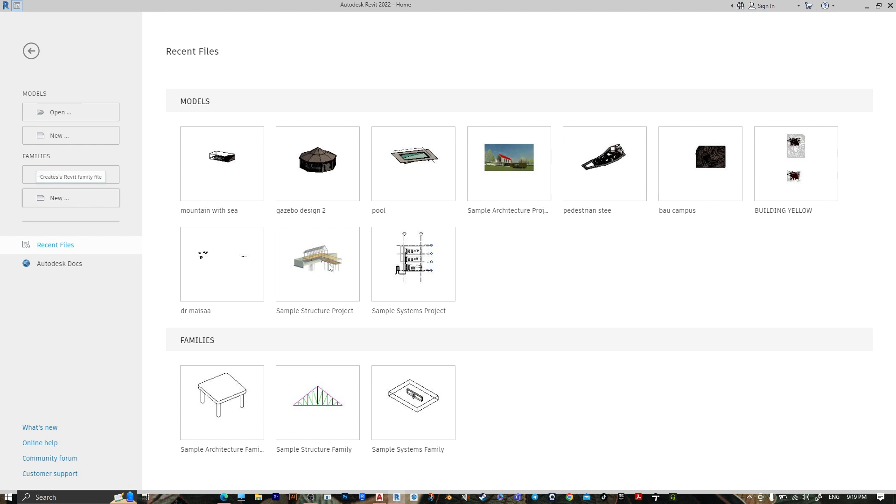Open Revit, go to families, go to new, go to English, select metric furniture system, then press open.

Change the unit, press UN, go to length, make it meter, and the rounding to decimal, then press OK, then OK.

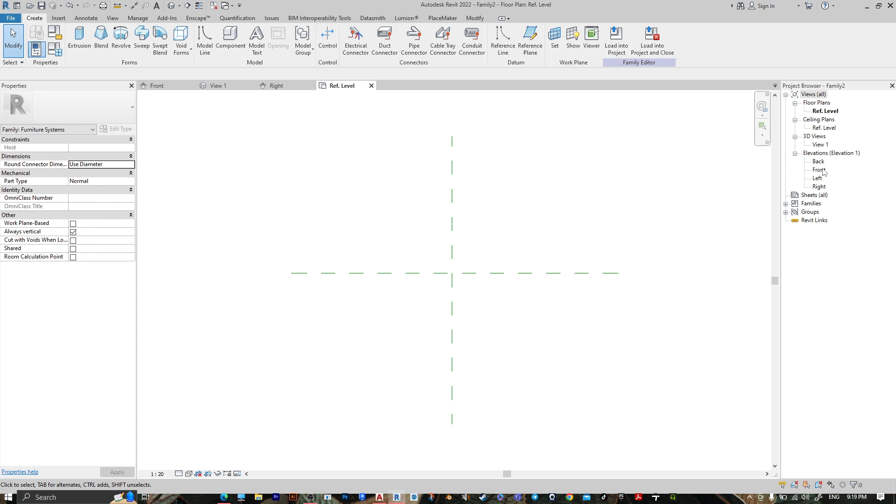Go to front, go to insert, import CAD, select your AutoCAD file, change the import unit, make it meter, and the position, make it manual center, then press open.

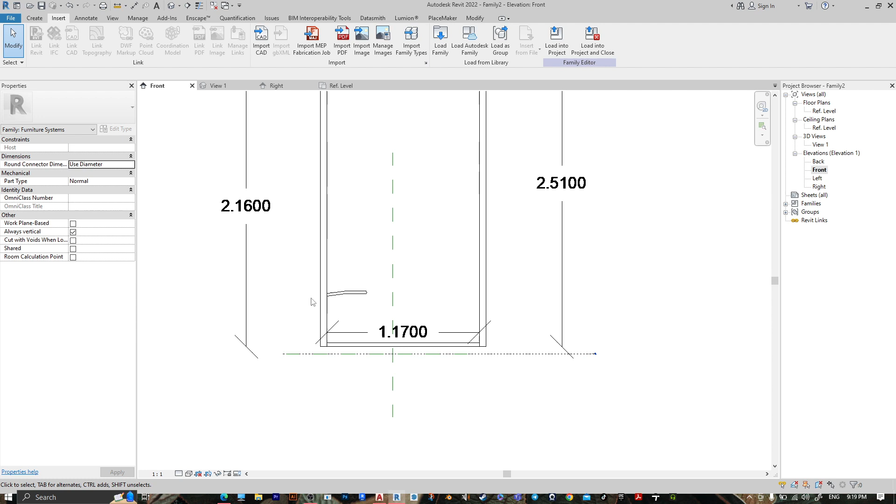Let's change it 1 to 1, move it, then go to create, extrusion.

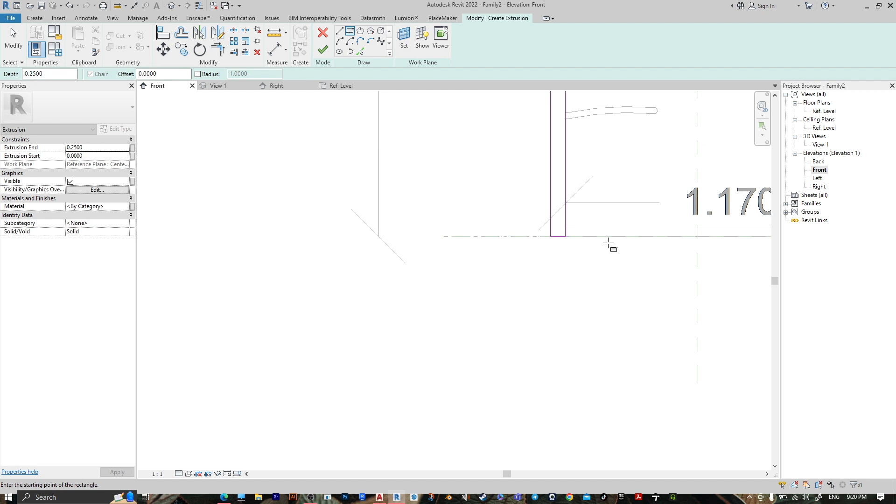Rectangle, select this one, then go to extrusion start from 0 and the extrusion end, let's make it 2 meter, then press finish.

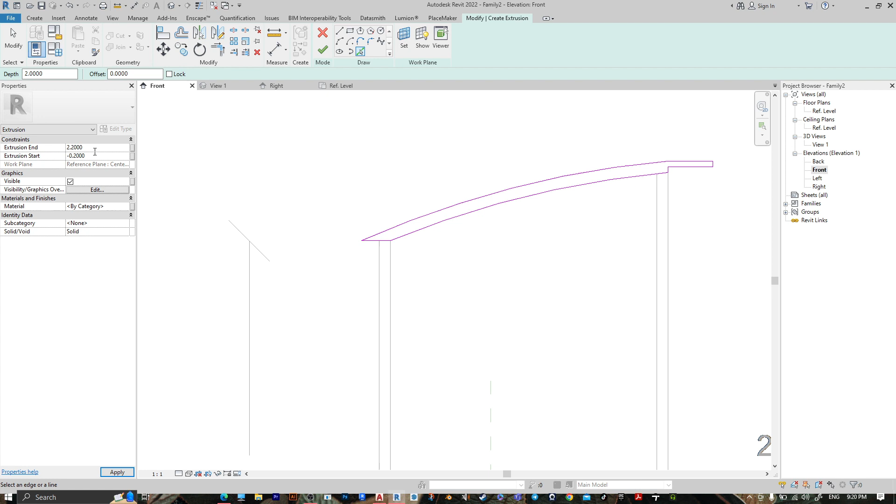Go to create, extrusion, pick line, let's choose this one. The extrusion start from minus 0.2 and the end 2.2. Then press finish.

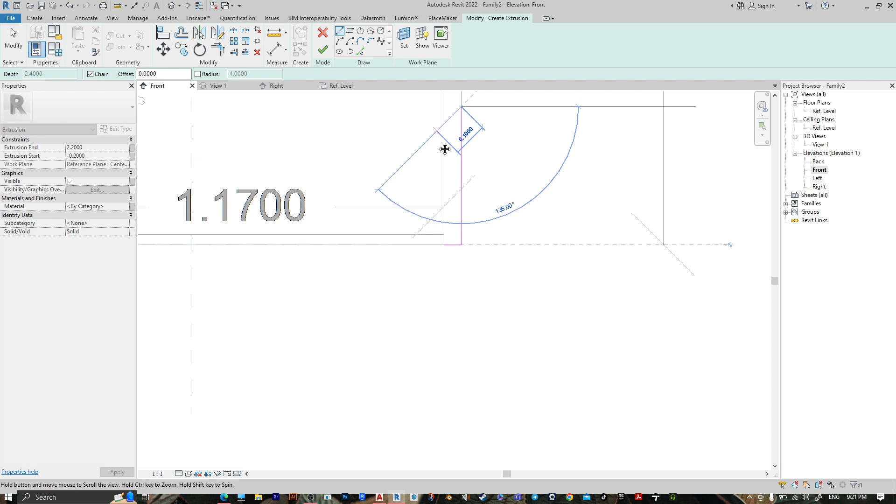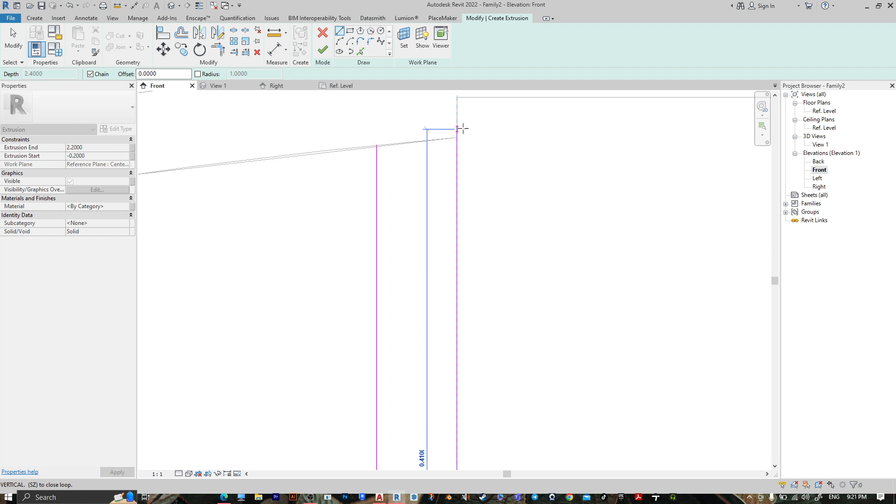Let's create this one. Go to create, extrusion, rectangle, or let's make a line from here like this. Let's go up 0.4. And from here the same, 0.4, and the extrusion start from 0 and end 2 meter. Then press finish.

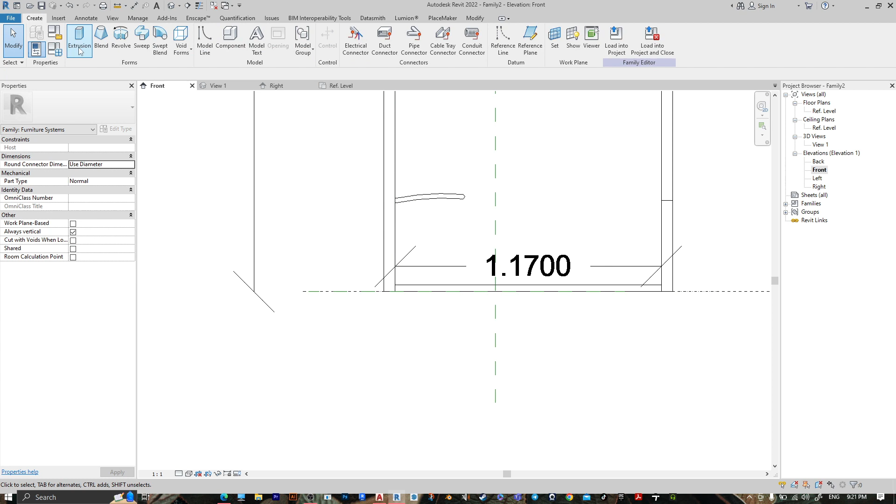Let's make the ground. Go to create, extrusion, rectangle, and let's make it from here to here. The same, 0 and 2 meter. Then press finish.

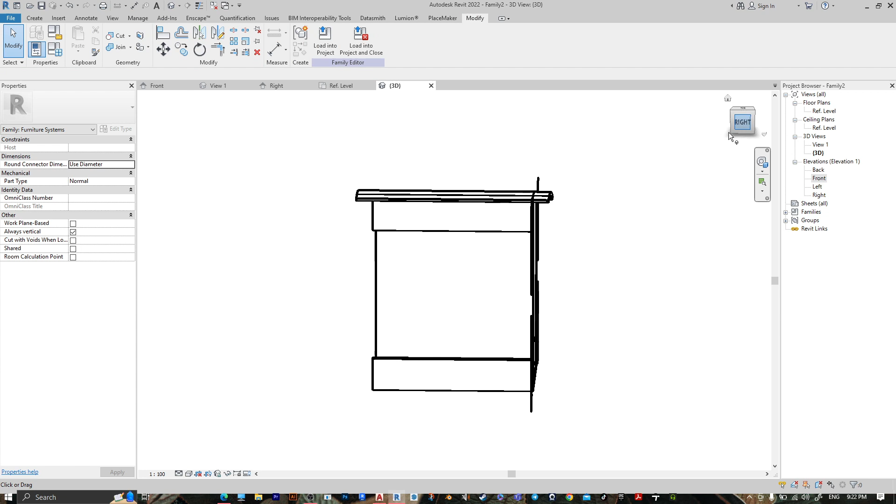Let's go to 3D, right, 1 to 1, create, void form, void extrusion, set, pick a plane, then press OK.

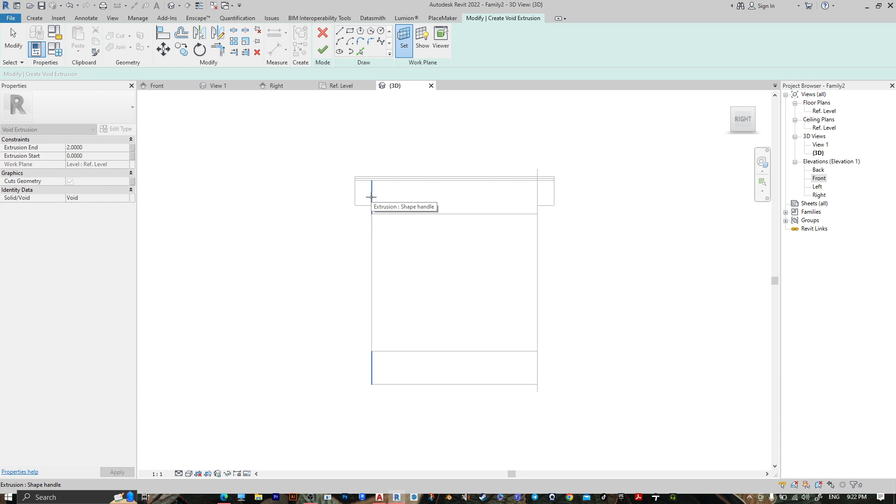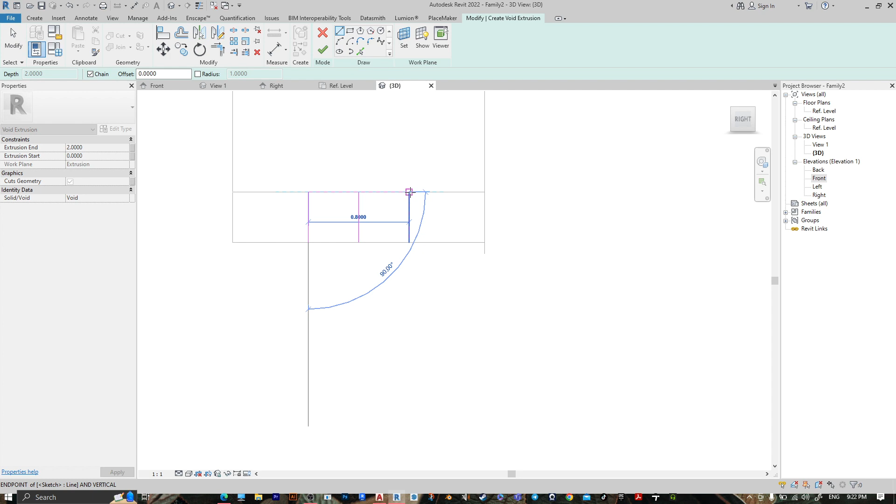Let's select this one, press tab. We want this one, and go line from the center, go offset 0.4, and let's delete this one, then press OK.

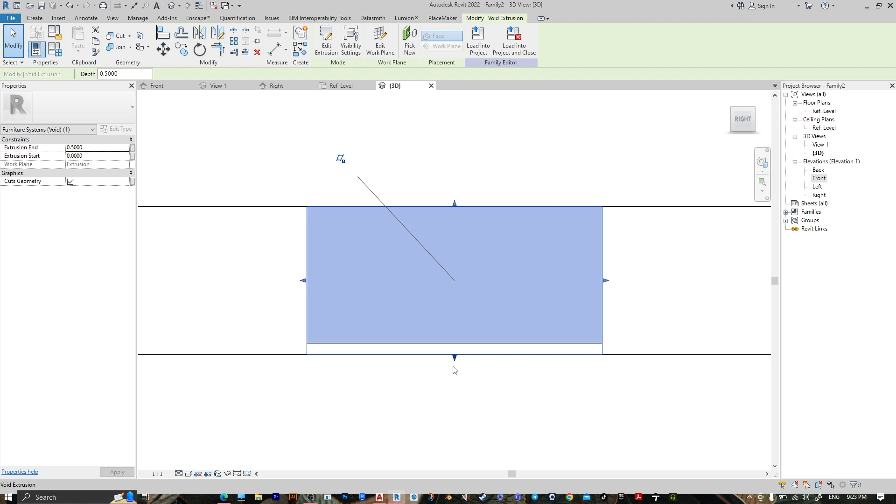Let's make it 0.5, and right.

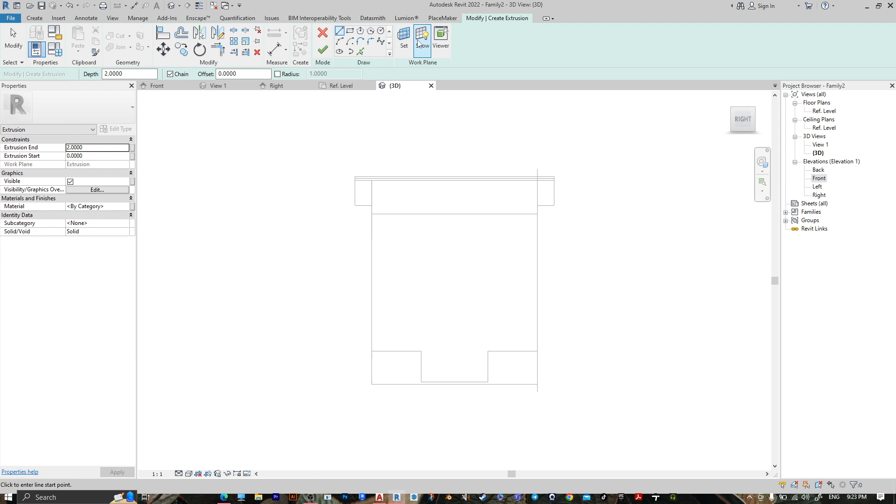Create, extrusion, we want this one, glass, create, modify the same, and go set, pick a plane, the same work plane, then rectangle.

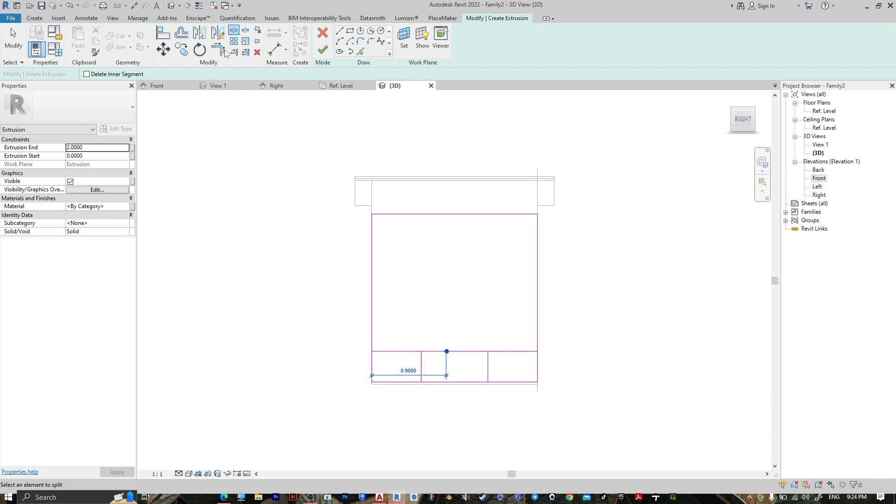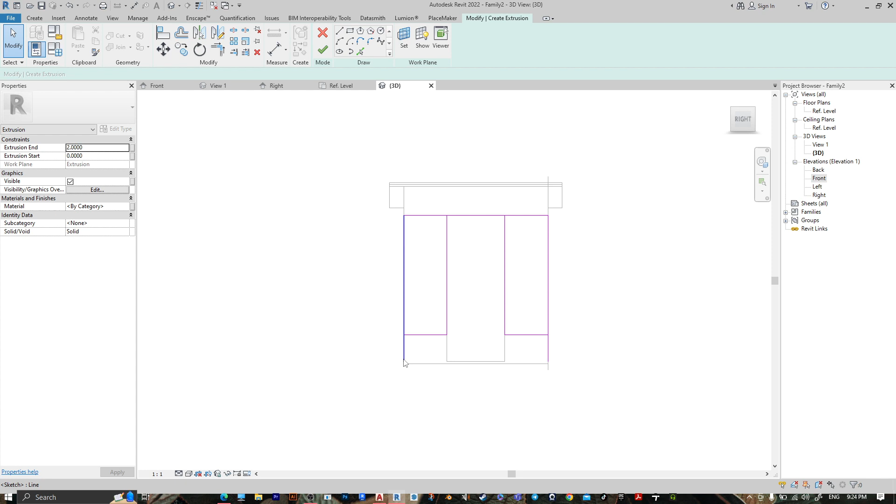Split and trim. Also this one. Then press finish.

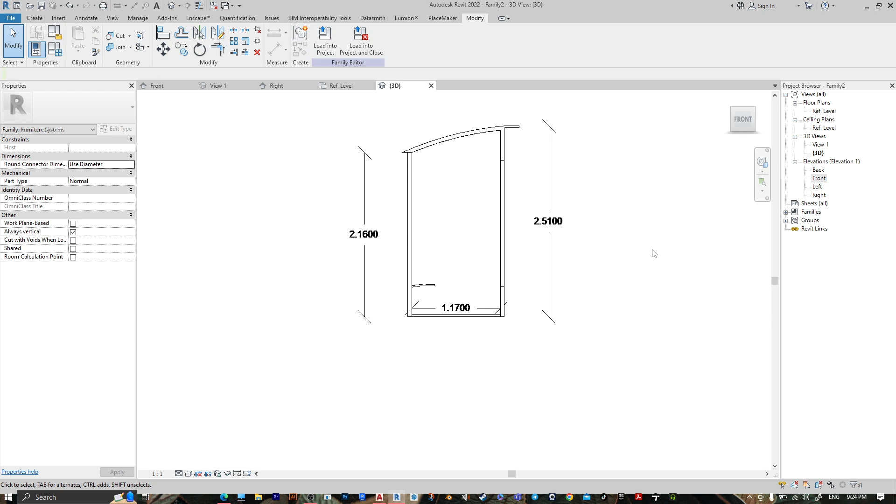We want this one. Create, extrusion, pick line, go to front, set, pick plane. Okay.

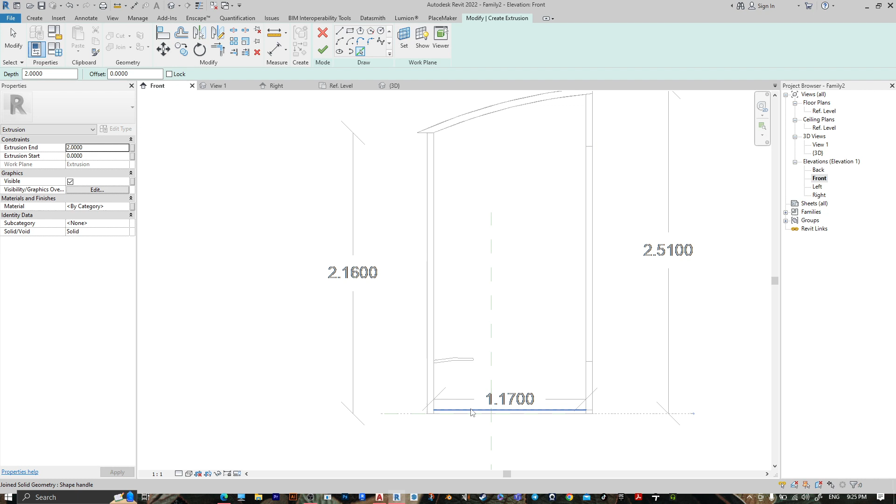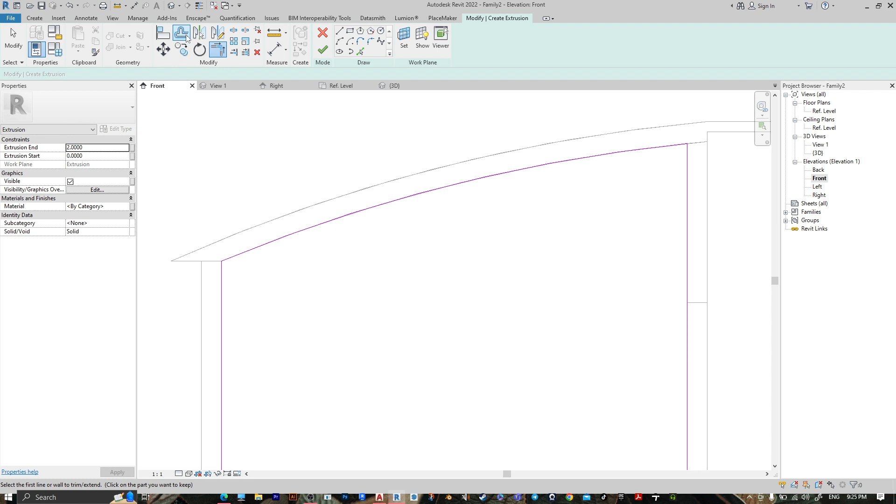Let's trim this one. Go offset. We don't want a copy. Also 40. And from here the same. Then press finish.

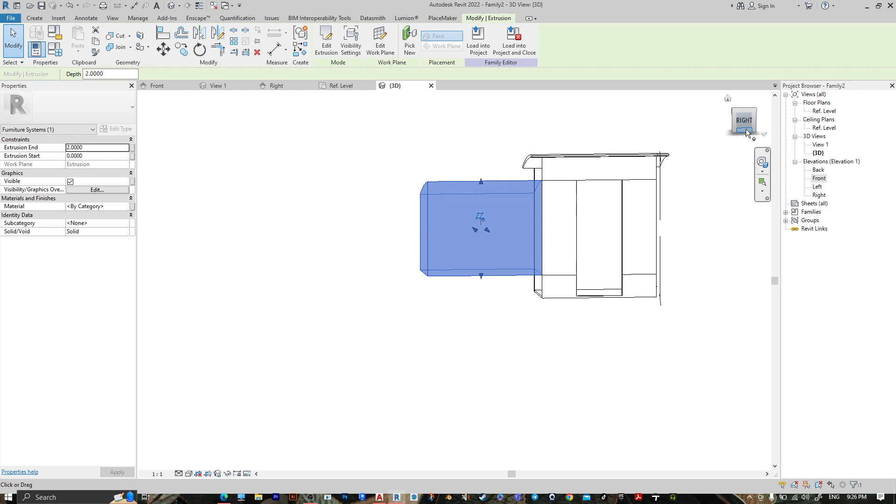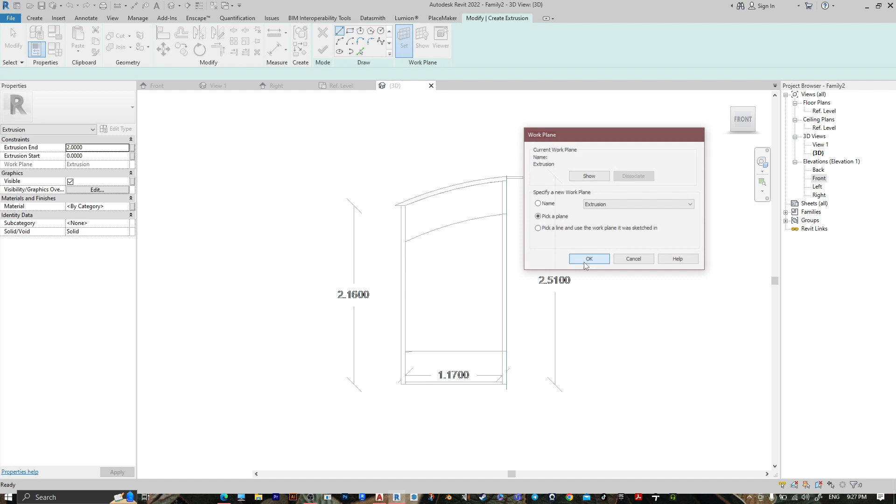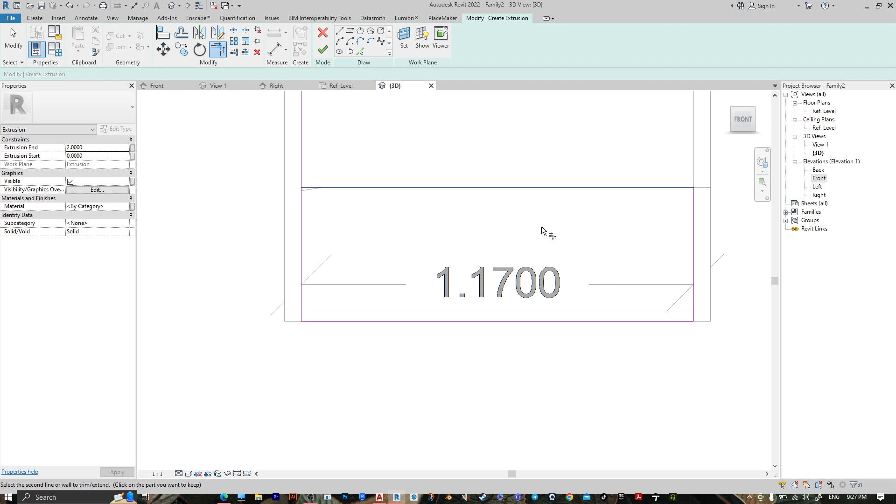Also create, extrusion, set, pick a plane. Okay. This one. Trim. The same. Press finish.

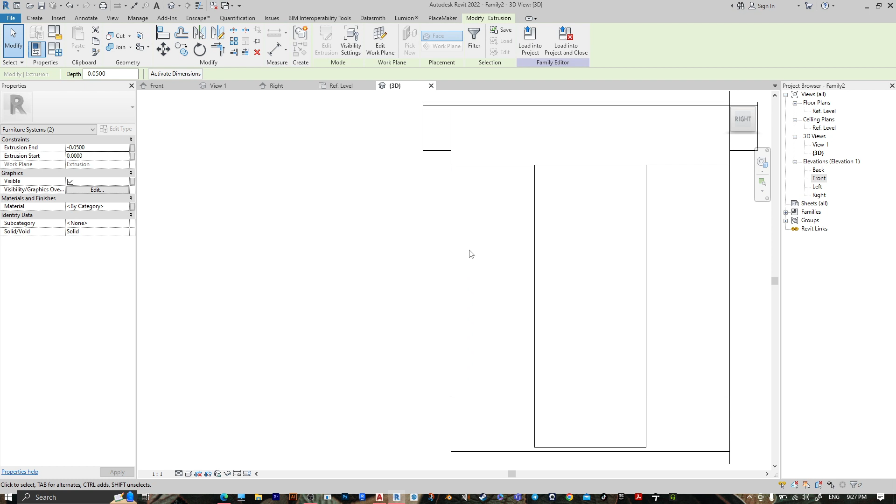Minus 0.05. And we want to select all of them. Press Ctrl to select it. Go to right. Let's make a copy. 0.05.

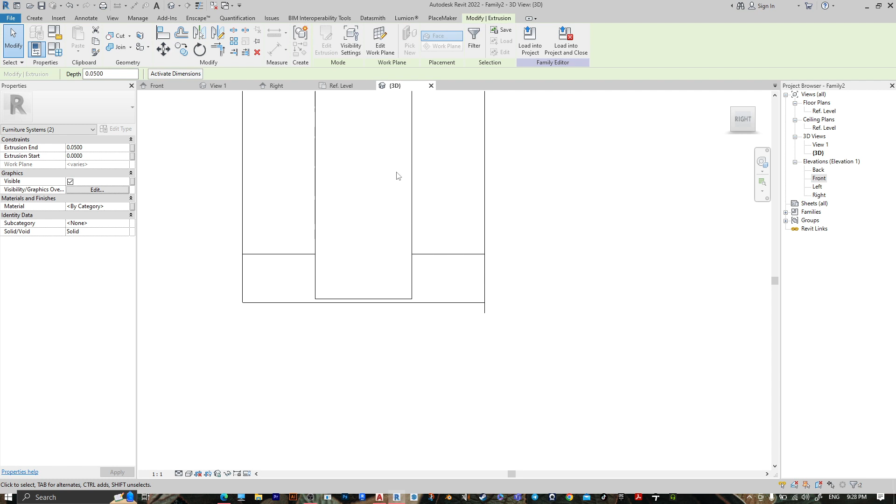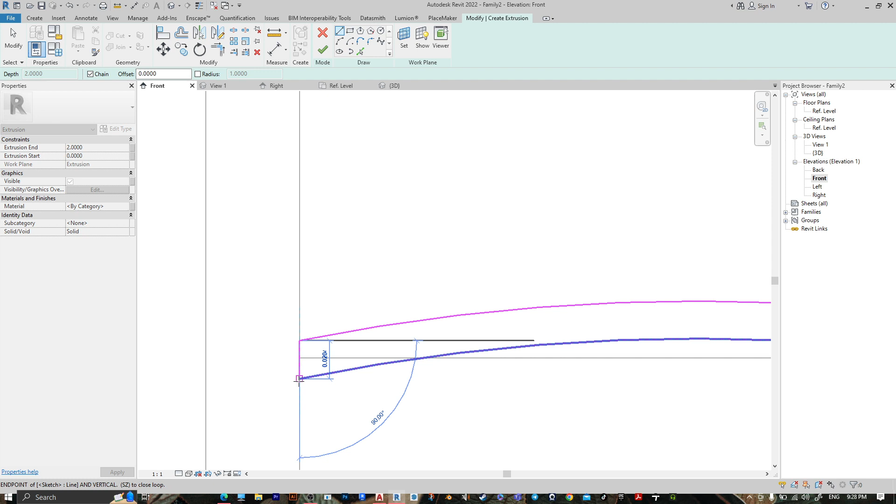Go to front. Create, extrusion, pick line. Then press finish. Go to 3D. Let's make it minus 2 meter.